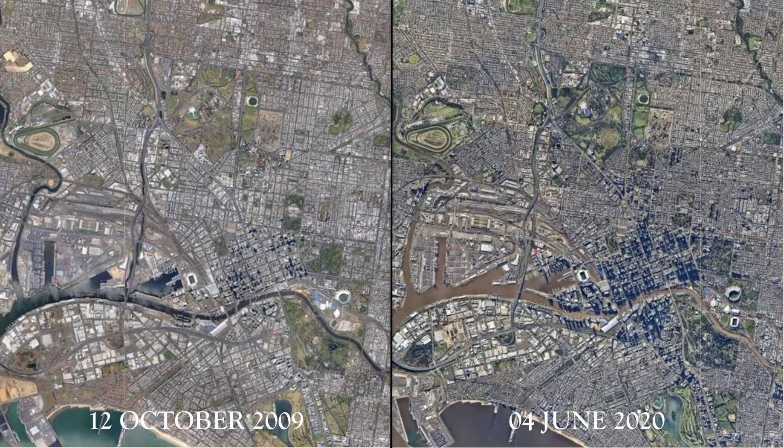As many of you must know by now, urbanization is taking over the world. The once soft soil is replaced by impermeable concrete and flowing rivers polluted. Wildlife are effectively driven from their homes. The increasing threat of near extinction for many species across the world is an upset to the Earth's natural ecosystem. An important urban impact is the lack of green corridors for wildlife to travel to and from safely in the hunt for food or a home.

Especially with humans around, most prefer to hunt at night under the cover of darkness. But with significant light pollution, it is dangerous and difficult. The urban heat island effect has also greatly altered the city's environment conditions, forcing wildlife to relocate. Despite knowing this, not much has changed in how we build our cities or treat urban nature. Humans are quick to remove everything non-human, buildings designed to purposely keep nature out. But Anurapolis is going to change that, and we want to bring dirt and non-human life back into our lives.

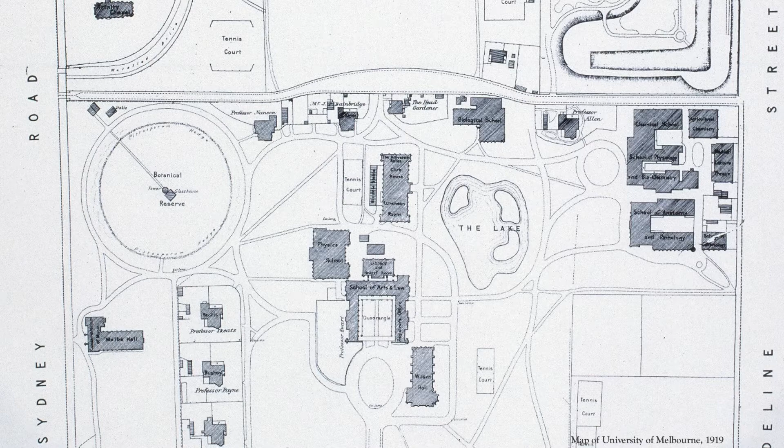So if you didn't know, the University of Melbourne had an old lake that was used to house native flora and fauna, and was a fundamental source of freshwater food and life. Old photos show its picturesque nature and are a testament to the history of the Wurundjeri people who used this lake as a food source to capture eels or harvest vegetation. The lake was filled in the late 1930s for a new chemistry building, which begs the question of what happened to the wildlife that relied on the lake, and can they be brought back to what was once their land?

There are few successful precedents that have included plants, animals, and humans as stakeholders, which shows a clear gap in the knowledge, with one successful precedent being the Perth Cultural Centre Urban Wetlands, which has meaningfully integrated the natural system into the built environment and received positive community feedback, and a significant increase in numbers and types of species observed there. Now, the project was initially briefed by Hassell, whose aspirations neglected the non-humans, and so this was rectified to ensure non-human inclusion.

The first aspiration alludes to the building being an observational laboratory for scientists, students, and wildlife that resides there. The building should also aim to bring together other non-humans by providing safe, green, dark corridors. The second seeks a unified collaboration to improve the biodiversity of the site and a collaborative caring of the non-humans to discover innovative ways to help urban wildlife thrive.

The third is for some habitats to be protected from humans and can only be observed. The wildlife there are allowed to live in autonomy. And the fourth is to ensure future design and construction decisions will be made for the benefit of the wildlife.

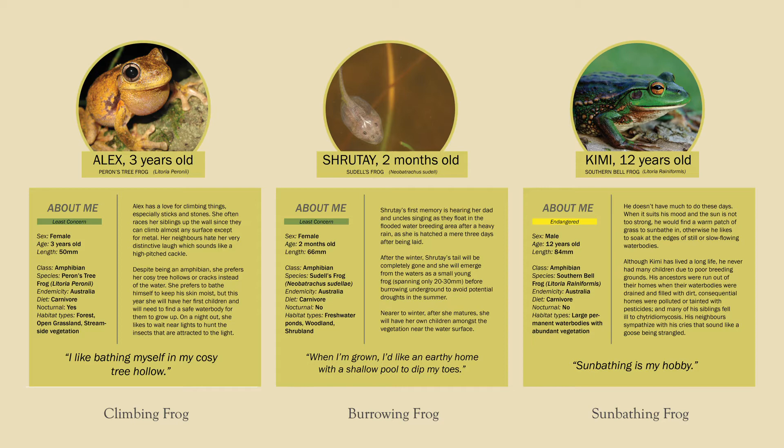And so to combat this, you'll see some anti-chytrid features such as sunny rock piles in shallow warm water, embankments to protect from cold winds, and shading of the wetlands should be avoided. But as it is a university, students aren't always around.

Cross-referencing this with the monthly mean rainfall and seasons of the Kulin people, the original owners of the land, crucially, porneet or tadpole season is during semester and a rainy month. So a safe and protected habitat is essential for our frogs, while still providing the humans at UniMel somewhere to learn and relax. So at this lake, there are 7 terrains to represent the 7 seasons, where the porneet season contains the frog islands, mangroves, and water ferns to help increase the chances of successful breeding and their survival.

Because of this, the lake is also sectioned into 3 levels of accessibility. Roughly half of the lake is inaccessible and given to the non-humans to live comfortably and freely, except for the researchers' island, which is directly connected to the frog research facility underground. And so, with the average amount of rainfall also considered, some areas' accessibility depends on the water level.

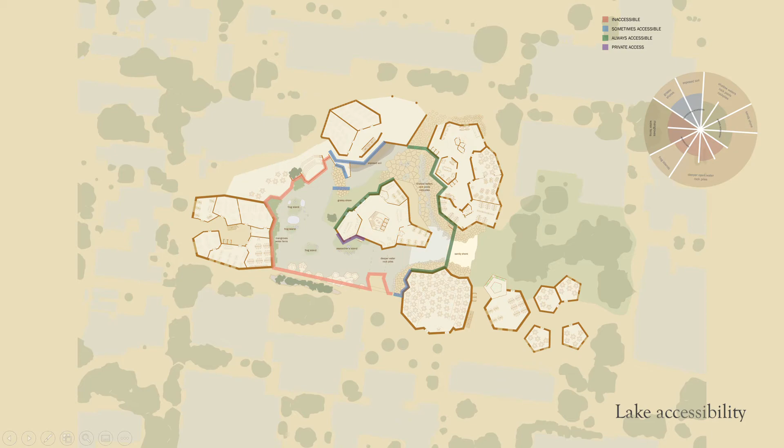September, October, also tadpole season, November, December, when the frogs are still growing up, have the largest amounts of rainfall. So the stepping stones below us to the central island is covered, completely cutting off half of the lake. Then the always accessible areas further up here have shallower waters with boulders and rock pools.

Now we'll start our walk through the eastern building on your left. Here, all the corridors facing the lake, you will notice that they do not have lights above. This is an architectural feature to minimize the impact of artificial light on the nocturnal, non-human life.

In the day, the corridor is brightly lit, even on a cloudy day, for people to travel through easily, and at night, the reflected light from adjacent rooms will light up the floor for you. Of course, if you are afraid of the dark, there are brightly lit internal corridors to use.

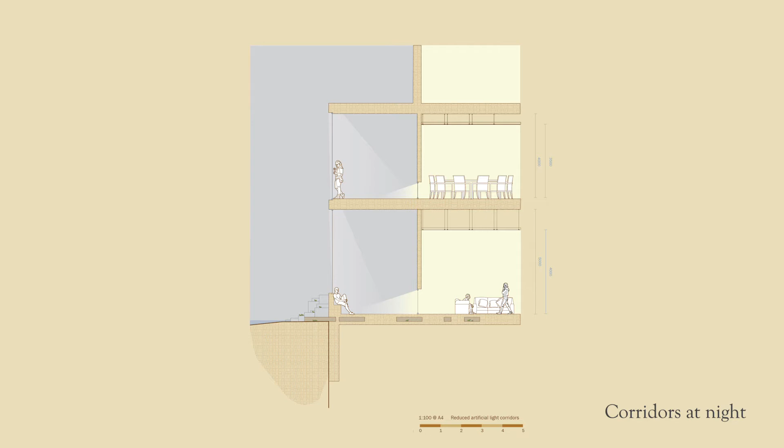On the other hand, the student biology lab, which is not used after hours, is able to have a full height window to maximize views over the water and mangroves during the day.

And as we spoke about different users during different months, most of these ground floors are open to nature and for non-humans to potentially run through the site when no humans are around. This means after hours, the site is returned to the non-humans, where a large percentage of them are nocturnal creatures. And at roughly dawn, the site is then reoccupied by humans.

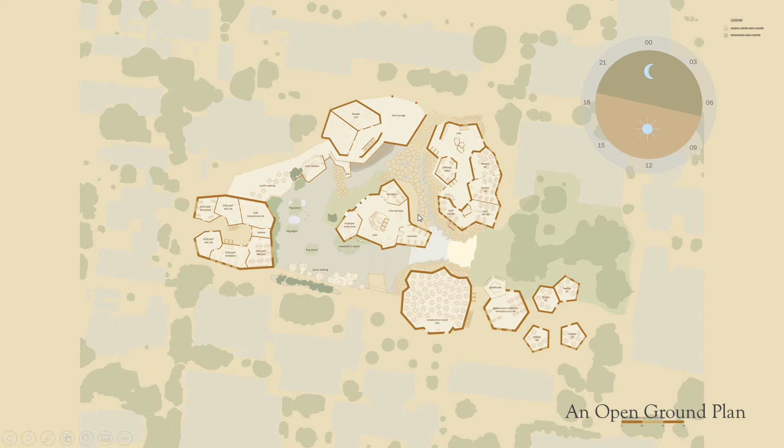And so we'll be coming out to Old Union Lawn, now named the Growling Grounds after Kimi, the growling grass frog. So there are these rocky, earthy boulders that surround the site. Boulder is a motif in the pre-existing wetlands and a key element in the ideal habitat for frogs and the survival of all living beings.

So the slow sloping bank here provides other non-humans access to a fresh water source. Anurapolis' design was conceived through the natural way rivers run and create fractal-like shapes, leading to its irregular, angular geometric language. And to the left, before we enter, are public seatings situated in the lake, designed to make you feel as though you are immersed.

It is a really nice place to sit during the summer. The wind off the water helps cool the air, and it's actually really refreshing.

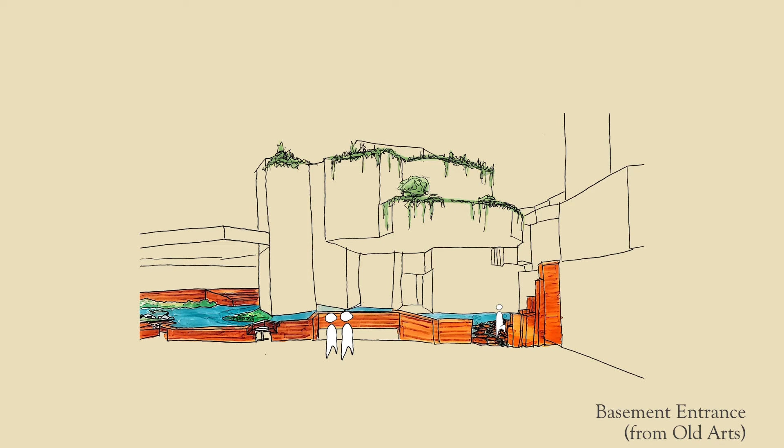So now out of the sun and into Sudell's subway, which is named after the burrowing frog. This underground connects each tower together. This forked passageway is a homage to the original flow of the Bouverie Creek through the old lake towards the Yarra River.

Then to the left is All Things Frog. This is the frog research facility and an observation bubble. The observation bubble is also adjacent to the frog specimen room, where sometimes frog-specific tours happen. This bubble will also allow researchers to further their understanding of how the frogs react in different environments.

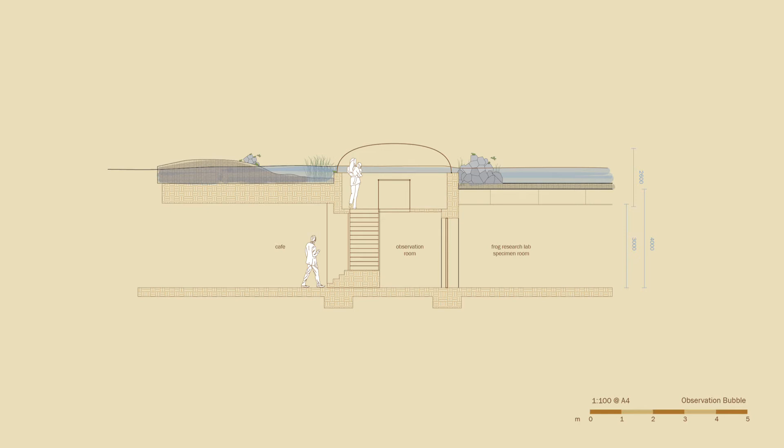The bubbles gently pierce the ground or water, allowing the humans to view the frogs closely whilst shielded by rocks or vegetation so as not to startle them.

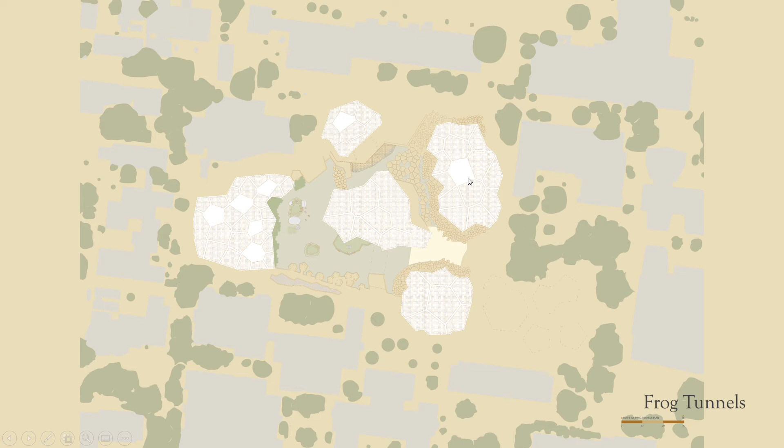And a fun fact, right above our heads right now are the frogs' very own passageway, a labyrinth of tunnels crisscrossed below each building so the frogs can travel across site easily away from the eye of a predator. Where if you look closely at the end of the tunnels, the frogs will hide before emerging under the cover of rocks or shrubs.

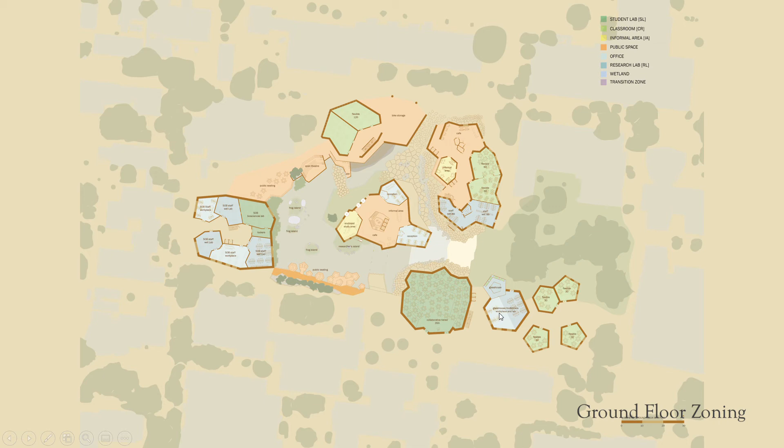So in a concept named anchors, the facilities that students use the most, such as labs or study spaces, are anchor points, and research facilities line the way. Looking at the map of the ground floor, green represents student programs and blue represents researchers. Here we are at level 4, where similarly, the programs are scattered to encourage passive or visual connection to real-world research.

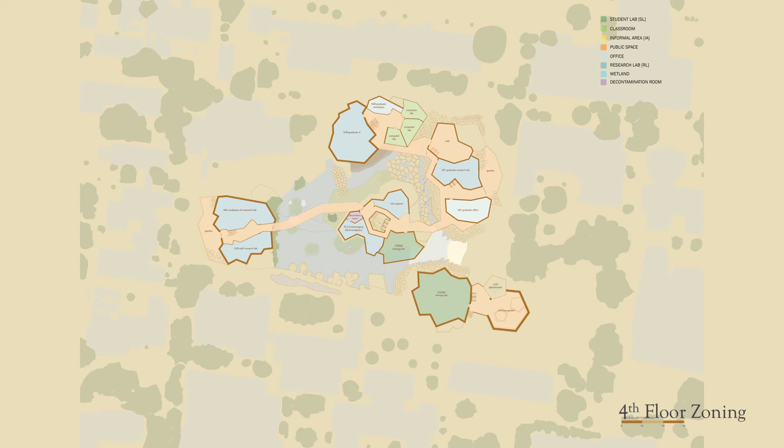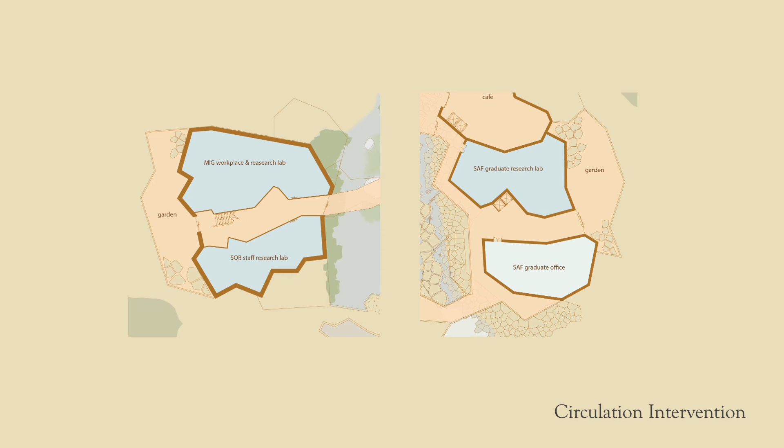You should also notice that the corridors are jagged and some a little narrow. This is designed to create opportunities for conversation and friendship, and hopefully collaborations between staff or faculties. It allows moments for pauses in between transitions, which increases the chances of people stepping aside and talking when they bump into each other.

So, in order to mediate between the environments of dirt and cleanliness, there is a transition decontamination zone for researchers, shown in purple here, to change clothes and shoes before entering the sealed lab.

If you haven't realized it yet, we aim to provide students with a living laboratory full of uncontrolled, non-human life forms and self-sustaining ecosystems to observe and study, like this place we're coming up to called the Valley. There are at least a couple of valleys at each building. The valleys were created as architectural cracks and crevices on the building's facade to allow non-humans and nature their own space in the urban environment.

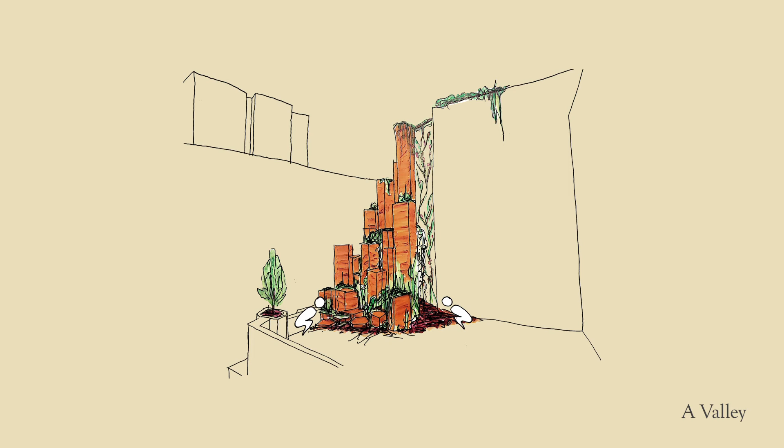As previously mentioned, it is a way to slowly reintroduce dirt and life into the building. To help this, the buildings are also made from rammed earth, an ancient technology that utilizes the dug out soil from the site to reduce material waste. It's finished matte, and its rough surface also provides a natural scaling wall for non-humans.

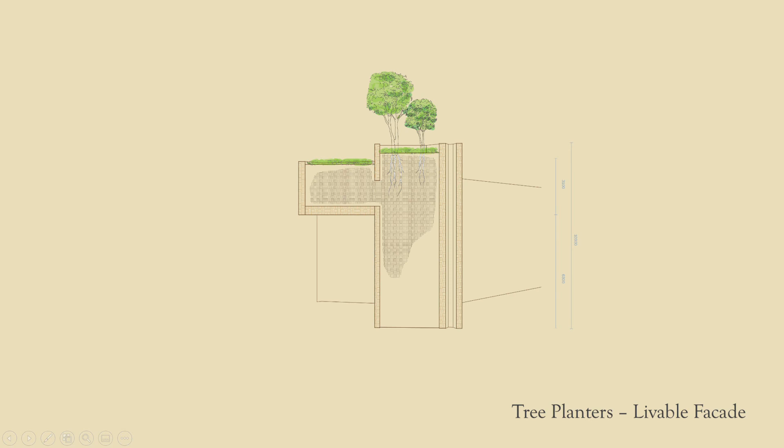Then here on the left, embedded into the buildings, are these tree-sized planters, essentially creating a livable facade, as non-humans can bury themselves or dig homes along the verticality of the structure.

Similarly, another one of my favorite areas is the Central Tower's atrium. Please have a look at it after the tour. It is made from living concrete, which is more porous than normal concrete and allows plants and vegetation to spread and grow over time, so it begins to take over the interior, reintroducing alternate life, dirt, and nature back into the building.

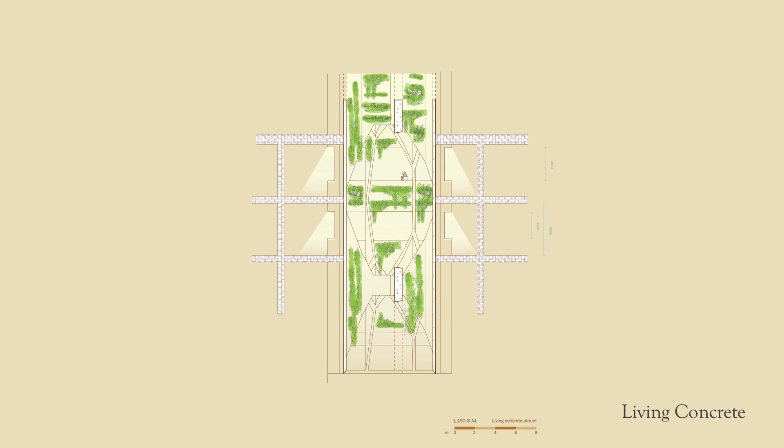Then, as I mentioned before, in a bid to reduce the impact of artificial light on nocturnal wildlife, light wells are introduced to lessen its intensity and impact compared to if the building was made of glass curtain walls. But sometimes night lights are important.

And if any of you by chance are here at night and you use the bathroom, take a moment, peek out of the thin windows, and you will most likely see a couple of frogs sitting on the ledge. They have adapted to use lights at night as hunting grounds for insects. Consequently, being around a nightlight would make the frog easier for predators to see. However, in Australia, there aren't that many predators, except for cats or large hunting birds, which aren't too common around the university.

And so if you step back from Anurapolis, you'll see it begins as a large cluster of Voronoi ruins, like the valleys, that seemingly crumble into the wetlands and the moat surrounding it, creating small stepping stones and piles of rocks for children to climb or for frogs to sunbathe.

Then as the years pass, the angular, irregular structure allows time and nature greater impact, meaning that the water will gradually erode the sharpness of the rocks, the slope of the banks, and the vegetation will grow and tumble to smoothen the extruded exteriors, to eventually meet the water at its edge.

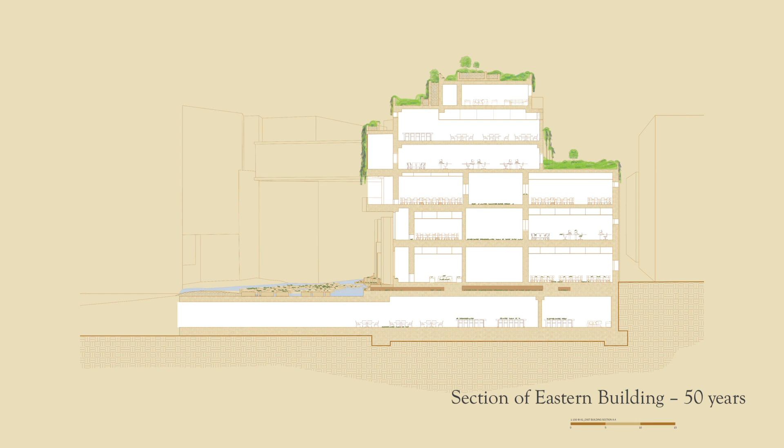So today we've seen how reconstructing the pre-existing biome of the urban environment can lead to novel and interesting architectural interventions that can benefit the flourishing of more than human communities. And Anurapolis aimed to integrate not just our students, researchers, and public, but animals and plants.

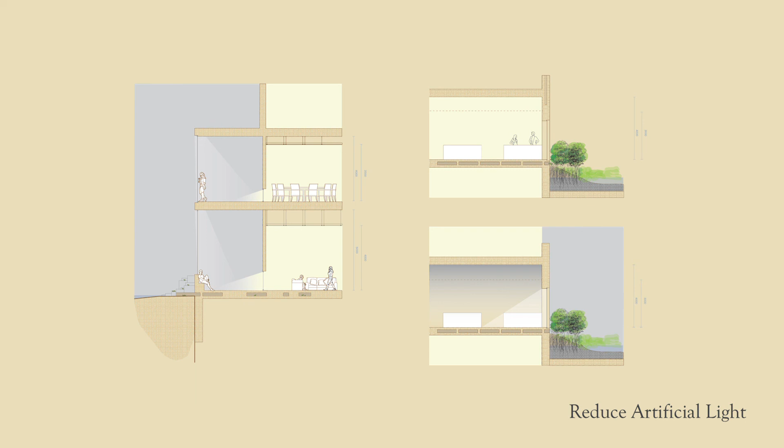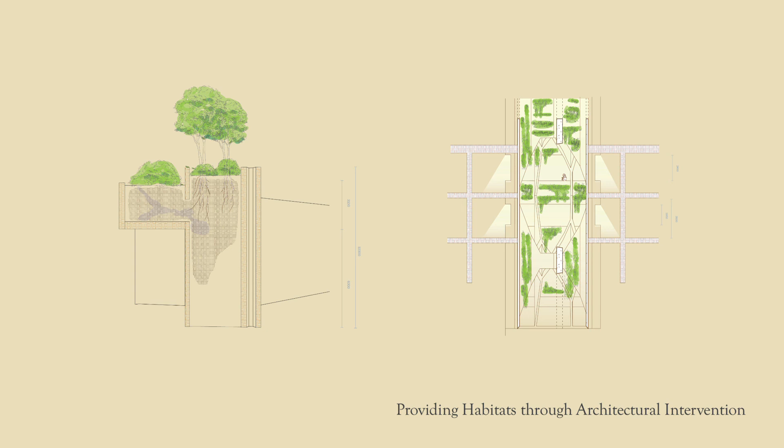We have seen ways to reduce artificial light's negative impact on our nocturnal life whilst providing views, and ways to maximize the site's potential by considering hours of the day or seasons, whilst also giving them places to make their home in the facade, and possibly to bring them back into the building. But most importantly, as a more than human site, Anurapolis is a place for all to observe and learn.